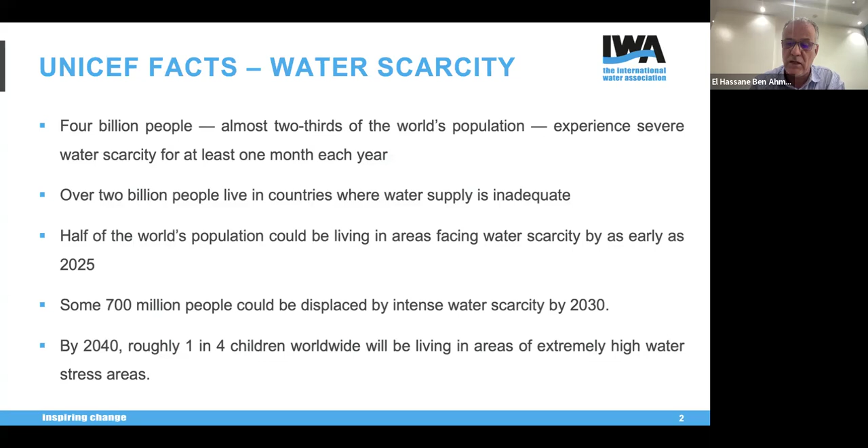For water scarcity, all of us are just human beings and we are looking for adequate water. So we can imagine that some 700 million people could be displaced looking for water. And by 2040, roughly 1 in 4 children worldwide will be living in areas of extremely high water stress. So we hope we are not going to reach these points, and all of us have to work towards this path. So my talk will be about India.

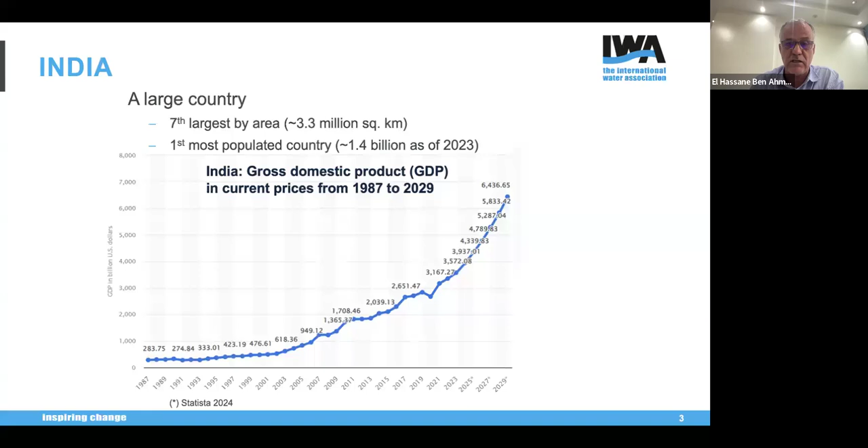I worked in India from 2013 to 2015, for 2 years, in Delhi. So the discussion today will be regarding the project in India where we worked. All of us know that it is a large country, the most populated country, around 1.4 billion as of 2023, and maybe now 1.5. The gross domestic product is increasing, especially since 2007, with a jump in 2021, and it will continue jumping. And it is, of course, the largest democracy in the world.

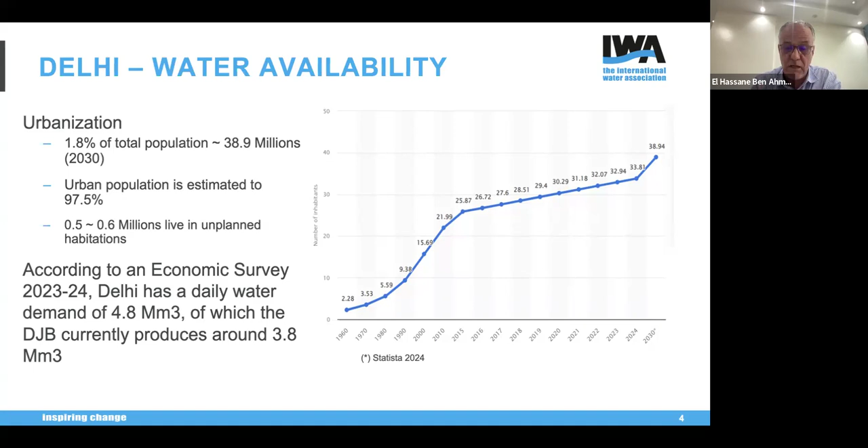According to an economic survey that was done in 2023-24, Delhi has a daily water demand of 4.8 million cubic meters. Out of which, DJB, the Delhi Jal Board, which is the sole supplier of water in Delhi, is currently producing around 3.8 million only. So there are 1 million cubic meters daily missing in the entire city. And this water, of course, is coming, let's say, from the rivers, or maybe from boreholes.

So the water scenario in India is quite alarming. Back in 1951, the water availability was 5,200, but in 2021, let's say 1,500 cubic meters. This decrease is quite a lot, just in 70 years. And we see, for example, in India, where we have the monsoons and everything, we still have this problem. And it is estimated it will be reducing much more by 2050, if not before.

As I work in India, what we can see is that there are inadequate sizes of pipelines. Actually, the cities are developing, and the water demand is changing at the same time. There are areas that used to be residential, and then they were changed, having high-rise buildings without changing the diameters of the pipes. So we are keeping the same pipes for more people. Average non-revenue water is very high across India, between 50-55%, and it might be alarming in some other places.

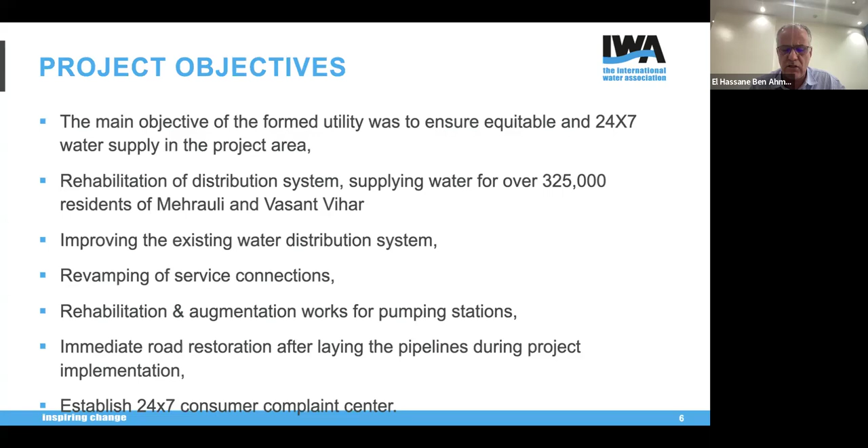The next objective is rehabilitation of the distribution network and supplying water for these areas: Mehrauli and Vasant Vihar and adjacent neighborhoods. Improving the water system, revamping service connections, because there were also customers without connections, with irregular connections. And of course, rehabilitation of the pumping stations, road restoration, and establishing a 24/7 consumer complaint center.

The intermittent supply, as I was saying, for example, in parts every 48 hours for a few hours. A large number of valve operations. This is the situation that we found at that time. There was one area with around 3 kilometers of pipes where we had 65 valves, and we just didn't know where all of them were.

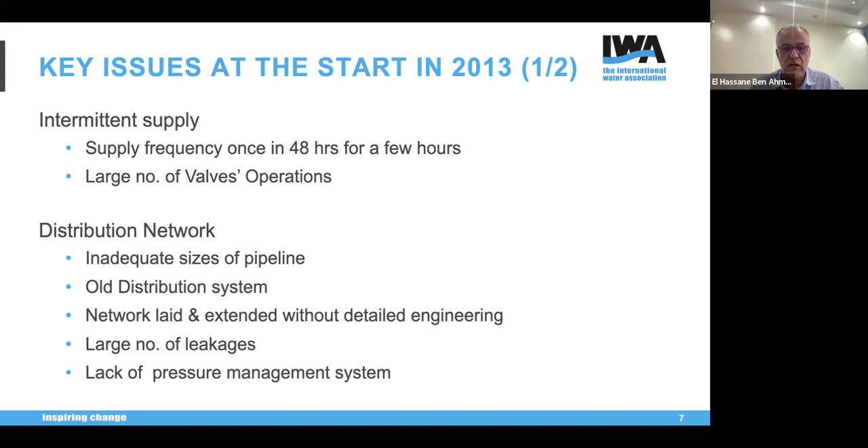In the distribution, as we said earlier, there were inadequate pipeline sizes. The distribution system and even the pumping station were very old. The network was without detailed engineering, with a large number of leakages. And we were distributing water by tankers as well. And of course, in this kind of situation, there was a large lack of a pressure management system.

Again, I would say that for every water utility, usually if we don't have drawings, we have GIS. In the parts where we were working in the city, there was no GIS, and even the drawings that we received were not updated for the same areas. Sometimes we used to have 3 to 4 drawings depending on the person who had these drawings. And of course, there were no updated drawings.

We used to have AutoCAD, I mean, several formats of the drawings that we received, but they were not accurate. And sometimes we were receiving complaints from customers because they were either not receiving water, or maybe they had bad water quality, and sometimes we just didn't understand why, for example, only this one customer doesn't have water while the neighbors have water. So we had to go through several processes. We had to do excavations in order to understand what's happening.

Most of the customers' meters were very old. They were mechanical for the ones that were installed. And of course, we know how aging impacts the accuracy of mechanical water meters. And the customers were not even paying their bills. And it was intermittent water supply.

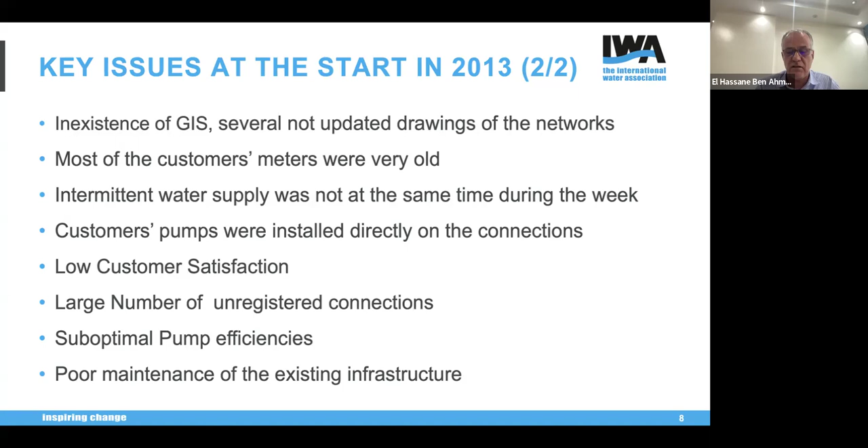We had, of course, a large number of unregistered connections. This is one of the problems with intermittent water supply, because there is no pressure on the network, on the pipes, and making a connection on the pipe during that time is absolutely easy. It can be done without any issues. There were also the pumps. They were not working at their optimum because they were very old, and I think they were at kind of 40–50%. And of course, poor maintenance of the existing network.

So in order to transform from intermittent to 24/7, we cannot just say, okay, we will start doing it by tomorrow. Before that, we had to discuss with the customers and with the customer representatives. For example, in India, in Delhi, which was absolutely fantastic, they have what they call the RWA, the Resident Welfare Association, representing the residents in what they call a colony. Each colony used to have its own tank, not connected to the other colonies. Water comes to the colony's tank and is distributed from there. And Delhi, by the way, is a flat city, which means we are pumping all the time whenever we distribute water.

What we did, we went through discussions with the customers. The idea was to tell them, okay, we are going to transform to 24/7, but we cannot do it if they keep their pumps connected to the connections. So we were asking them to disconnect their water pumps, but we engaged with them through the entire process. They were involved, I wouldn't say since the design, but basically from the design until the installation. We had weekly meetings with them to explain what we want to do, so that they understand and can remove their water pumps.

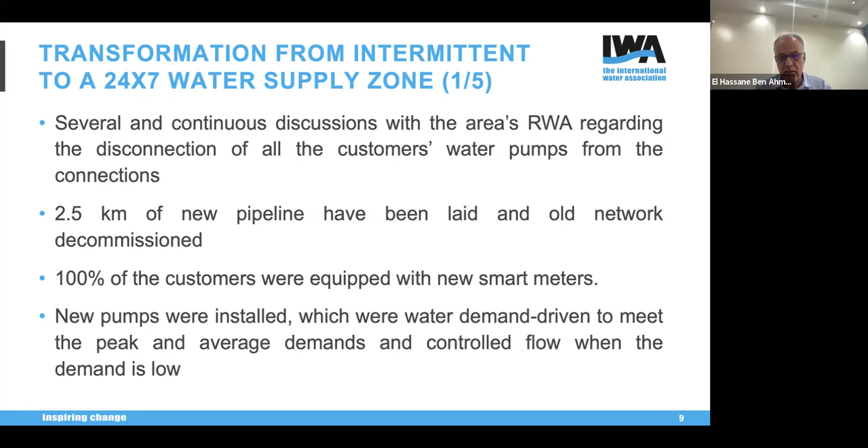And actually, we had the pressure sensor at the critical point, which was communicating to our system in the pumping station. So when there is less pressure, let's say less than 1 bar, it can start. And I will show you the picture. This is the picture that we have for these pumps.

We had, for this area, these 3 large pumps, and all of them were VFDs. And we have the small ones. So it was depending on the demand, because of course we have all of these scenarios regarding the starting of the pumps and how many pumps will be starting at the same time. And of course, during the night we keep one of the small pumps working, so that we keep pressure on the network.

So let's say that someone wakes up in the night and wants to go for a shower, or for the toilet, at least when they open the valve, the other pump can start at the same time. So that's what we did.

So from this, what we realized is that it was possible to increase water supply from 2 hours, or maybe less than 2 hours per day, to 24 hours per day because of the genuine working of the pumps. The complaints about tankers, the customers complaining all the time because they were not receiving enough water, completely stopped when we started working this way. All the boreholes, because we also had boreholes in the area, were phased out.

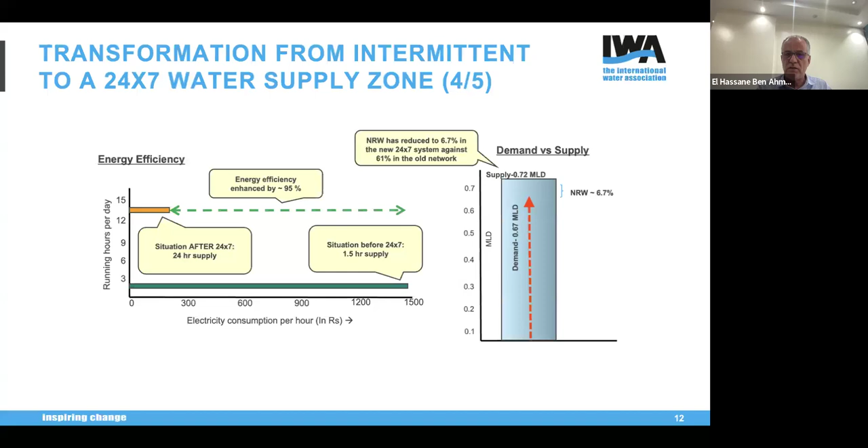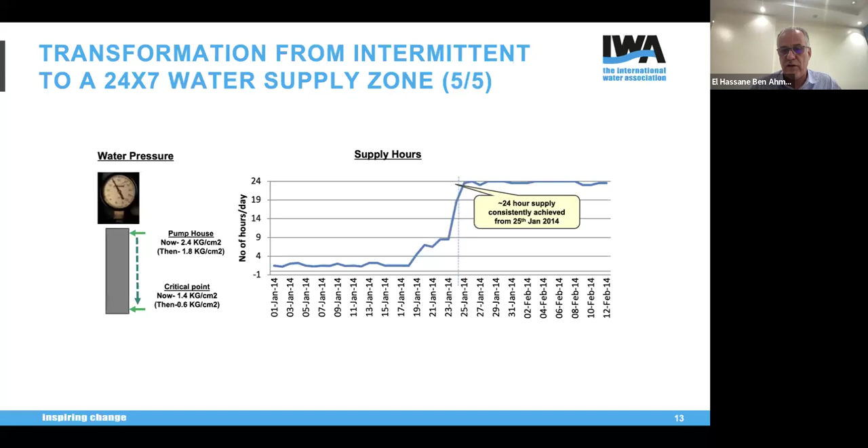So what happened next? It was absolutely very simple. I left that project back in March 2015, but actually the contract for that project finished this year, 2024. As long as it was successful in that area, they said okay, we will do it in two other areas. So that's what they did.

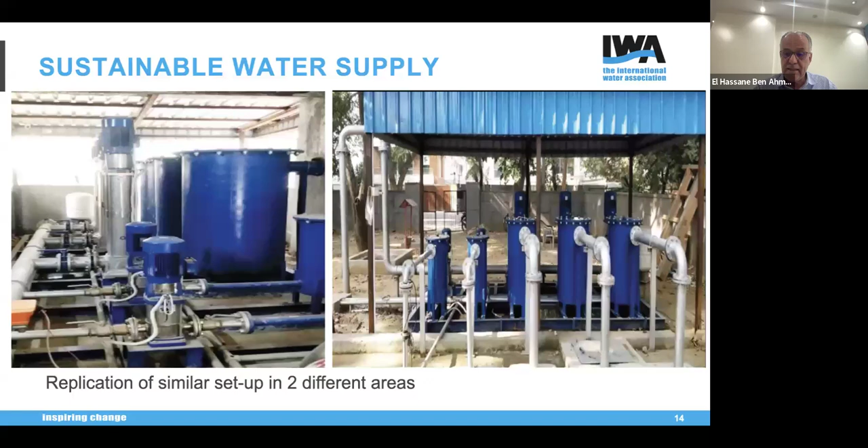You can see the pumps on the right and the pumps on the left. It's just a similar setup that they did, and they did the same. For these areas again, they shifted to 24/7, and there was a reduction of non-revenue water from around 60%, if not more, to 15%. I think this happened back in 2019 or maybe 2020, because from the return of experience from the company and what happened, they were encouraged to go on.

The company wanted to extend the contracts, which was not possible for reasons I honestly just don't know. But anyways, they were not extended.

For energy efficiency at the pumping station, all customers were connected to the pipe network, because with this we are sure there were no illegal connections, not a single one. The engagement we had with customers through discussions is that they will have to pay their bills, because we are surviving from the bills. If they don't pay the bills, we will go back to the old system.

We had a 24/7 customer call center so they could call at any time if there was any problem, and our team was working 24/7. Even my successor continued in the same way. The collections have improved a lot, and the tankers were absolutely banned from entering this area. So we are sure that we are doing things right.

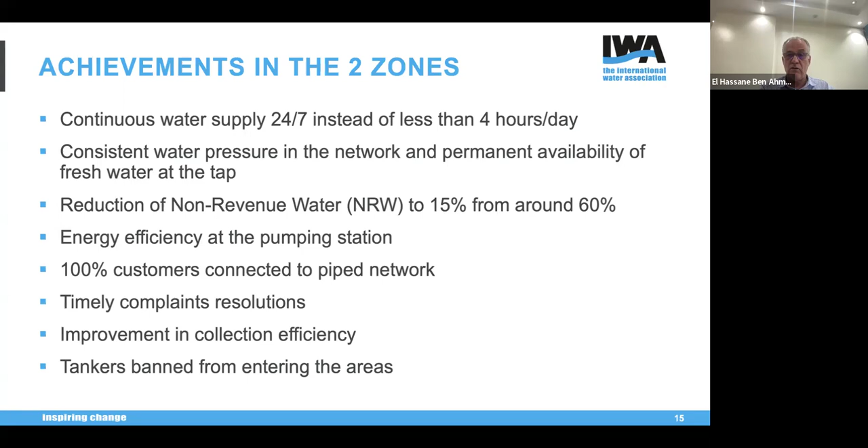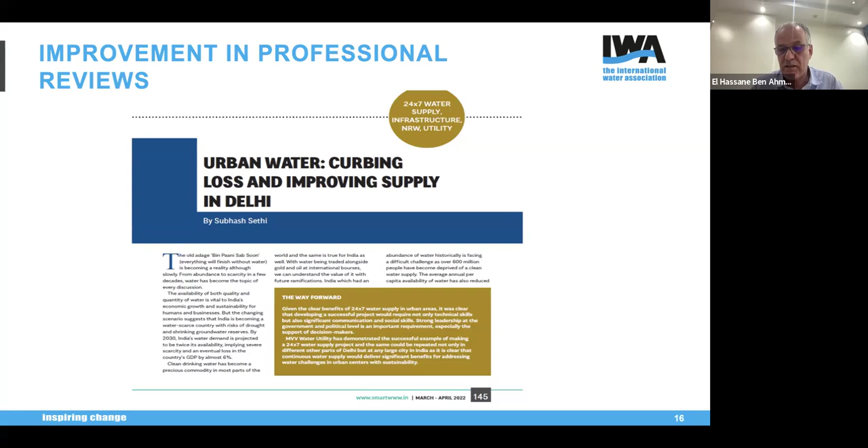This is a professional review talking about the project that we did in India, with the progress that happened. This article was done in March, April 2022, but things are still good. I'm happy that I worked on those projects, that we could do something right, and that we can show that we can

supply 24/7 — and this is my conclusion, we can do this supply, but what will be the cost? Because when we look at the areas where we were working, we did the rehabilitation of the entire network. Yes, it is costly. That's something we cannot, for example, do for entire Delhi, where we have more than 15,000 kilometers of pipes — it's a lot of money. So that's the cost we have to look at.

Maybe with the same network we can do some hydraulic modeling, or try to reduce the water demand, because for these areas where we were working, the water demand was around 250 liters per capita per day — 250 liters per capita per day.

If it can be reduced — for example, from my experience in Casablanca where I was working, it was less than 80 liters per capita per day — it's something we have to think of, because, of course, people were getting water 24/7, and everything was clean, so there was nothing dirty.

And of course, we need a correct design of the infrastructure — we have to know if we are using pumps, what kind of pumps we are using, what kind of efficiency we want from these pumps. We cannot just have the pumps we like; it's something we have to go through a calibrated hydraulic model, so we can know exactly what kind of pumps we need and what kind of network we will have.

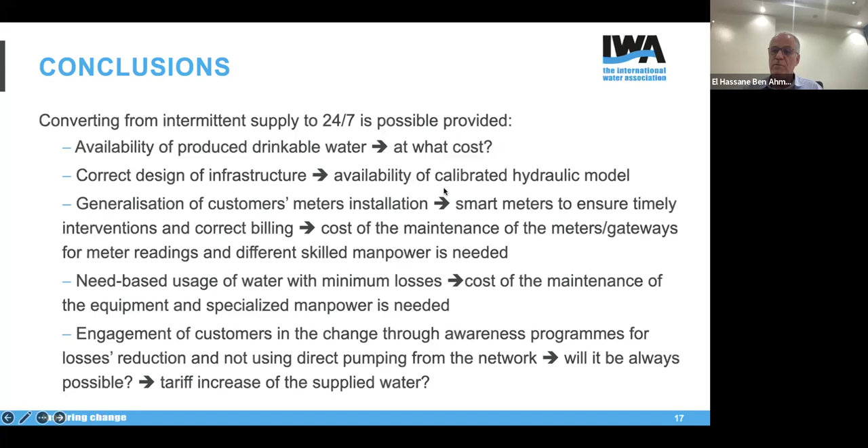For the large customers, in several cities in the world, if the bill is high, we can split it, so you can pay it in 3 months, 6 months, or even longer. But it is something that is discussed. And of course, if they still don't pay, we will disconnect them, and after that they will have to go to the tankers that we are managing ourselves. So we can say, go pay your bill, and the water will be cheaper than the water they will get from the water tanker.

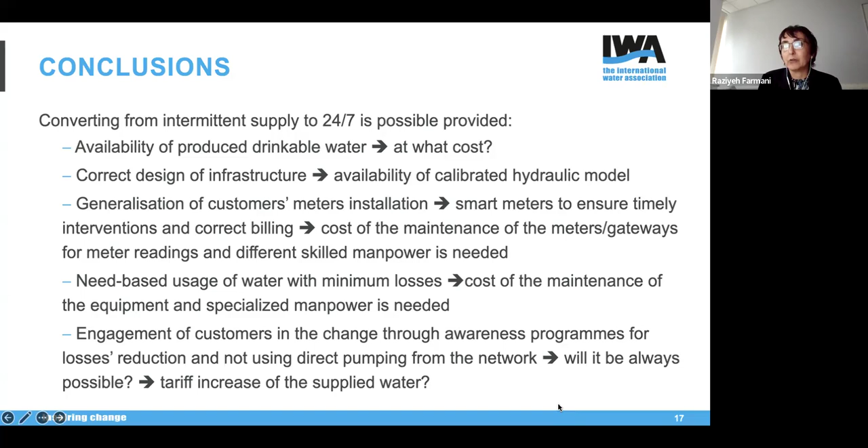So you mentioned that energy usage has reduced substantially. What are the key factors influencing that? Because it seems now everybody's receiving water, but supply hasn't increased. You installed some new ones, more efficient ones, but the reduction is substantial. How did you manage to achieve that?

Actually, I didn't show the pictures of the old pumps, I did this on purpose, honestly, because they were absolutely very old. When they were working, the population next to it would just wake up with the noise they were making, with the energy consumption, and with the cost of maintenance as well for these pumps.

They were absolutely very old. With the pumps we have here, these are standard pumps, very energy efficient at the same time. They're variable speed pumps that won't work at full speed when they start. There were like 3 speeds for the big ones, and for the small ones just 1. So depending on the water demand at that time, the pump will start at the first speed, then the second and third. We're not at the same speed all the time, so the energy consumption was absolutely very low.

During the night, it was one of the pumps, I think the one on the left in the presentation, the small one, that was working during the night. So the other pumps were not working at all.